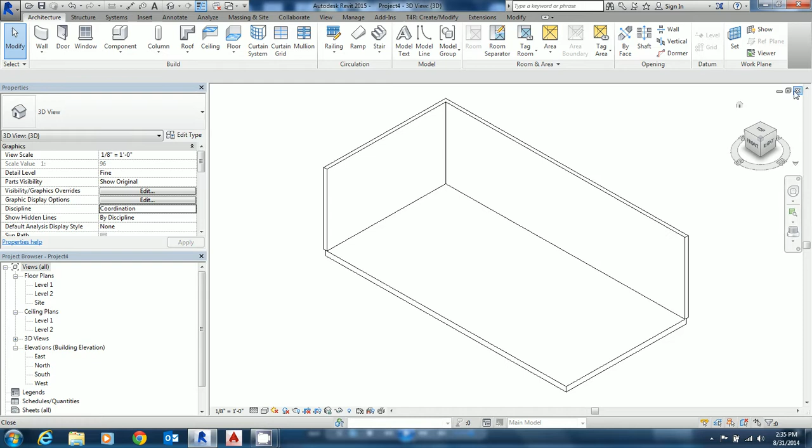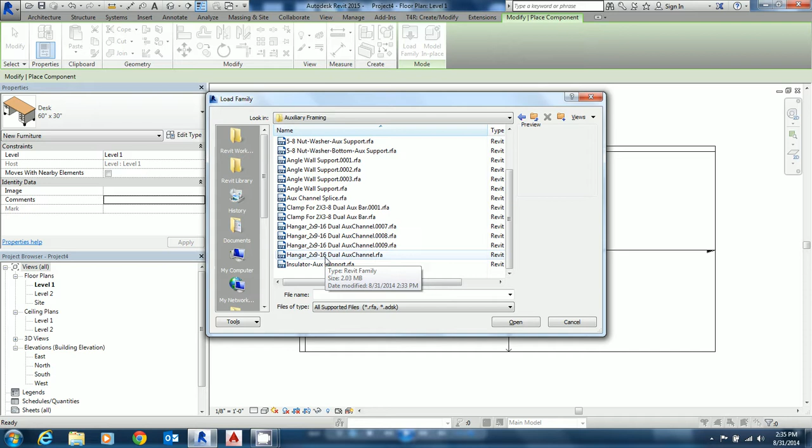So we have to load this in. So we go to our component and load family, go to our library, and then we're going to go here to cable tray supports, auxiliary framing, and we go down to hanger 2x9 here. Make sure you don't pick one of the revisions, pick the original here, and we'll say open.

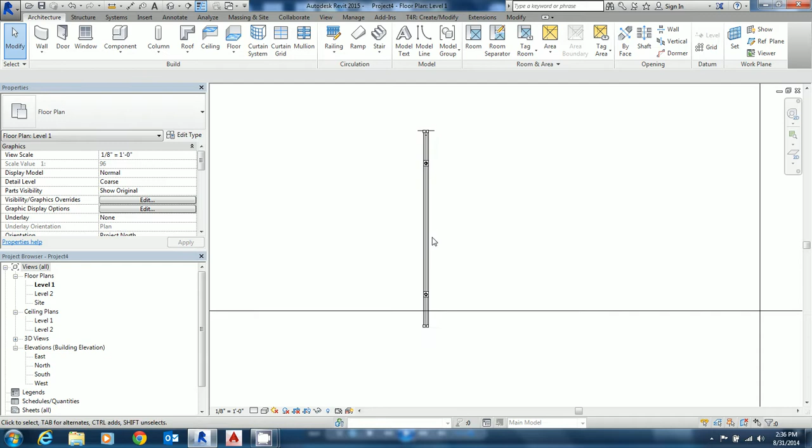It'll load in and we can see it right there, and we'll click it in place, and then we'll hit escape twice and we can see it there. We have our thin lines on to make it easier to see, but something just doesn't look right. So let's look back at our 3D view. If we scroll in on our 3D view, we can see that this aux bar is embedded in the floor, and the top surface of the aux bar is even with the reference level.

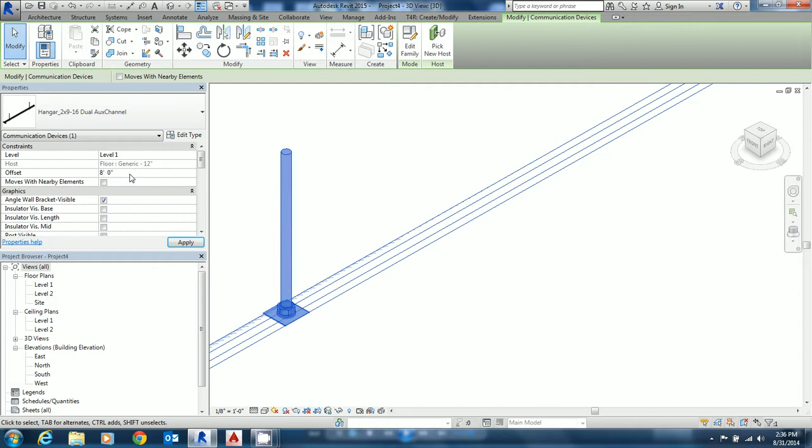Now this comes into play over here with the offset. This offset value is the level of the top face of the aux bar from the reference level. So let's just put it in at 8 foot. And we say OK, we'll remove our cursor out there, and we can see that this is now up at 8 foot above the floor.

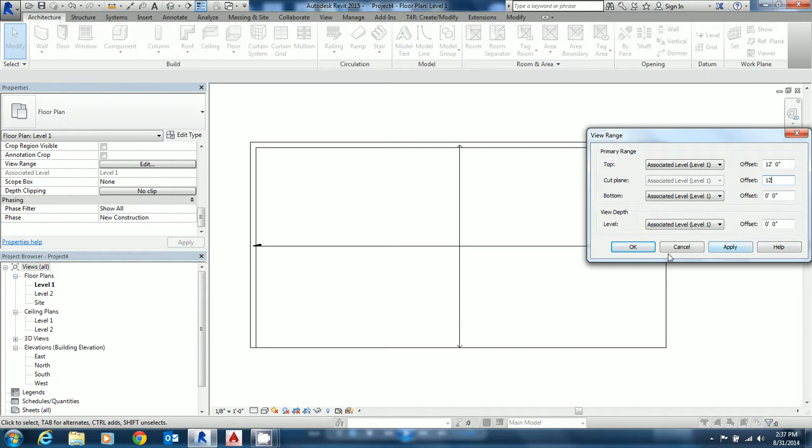And let's go back to our floor plan. We scroll out, whoops, it's not there. Well, the reason why it's not there is our view range does not see it. So we're going to edit our view range. We're going to change our top level to 12 foot, and we're going to change our clipping level to 12 foot, and then say OK. Now we can see it.

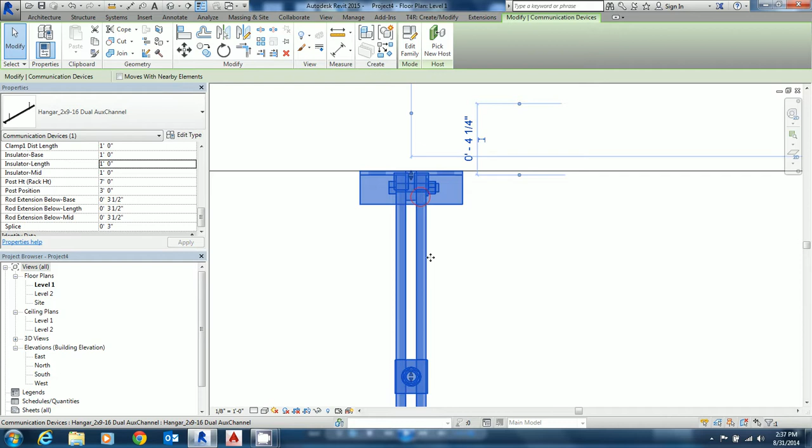So the first thing we're going to do with this is we're going to attach this aux bar to the wall. So I just grab a hold of it, make sure I get my move in there. I'm going to move it close and then scroll in, because I want to make sure that I snap it right onto the wall. Now our angle iron here is snapped to the wall. Again, if we go out and look at the 3D view, you can see that it is attached to the wall.

Now as we scroll in, what we see here is there are end caps visible on there, and we'd never have end caps on the aux bar where it's attached to the angle bracket here. So again, we'll highlight the aux bar family, and we're going to come over here, and in the graphics area here, we're going to scroll down, and we see end cap visibility base, and we're going to turn that off.

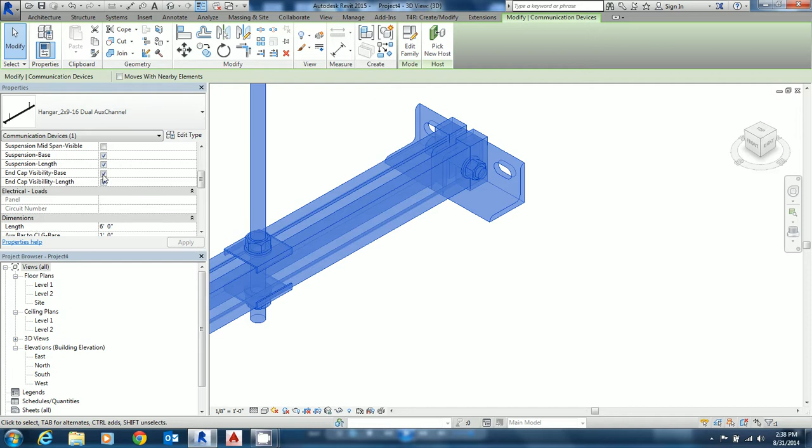And we see in here there's base, length, and midspan. Well, where that applies here is the base is this part here on the right where the angle is shown, and the length is here, and midspan is stuff that is in the middle.

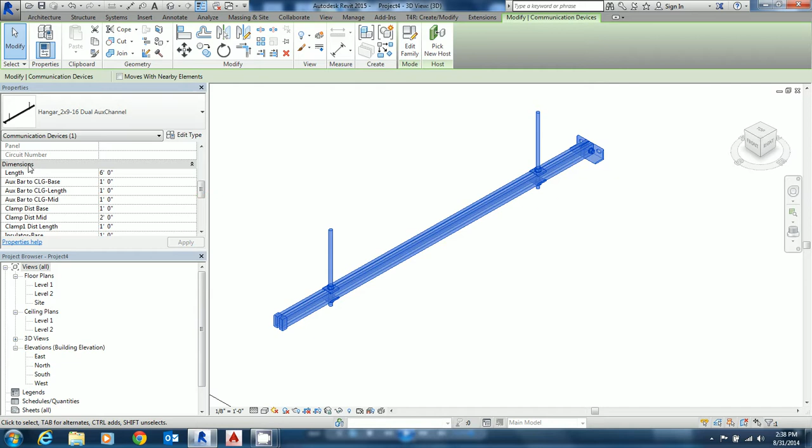So now let's see how we can adjust the length of the aux bar. Again, we come over, we select it, and in dimensions we select length, and a standard length is 10 foot. So we'll say 10 foot, and boom, it grows to 10 foot.

Now we see these brackets here with the pieces of all thread on it, and they go up for ceiling support. And how long those are is controlled here. Right now they're saying they're at 1 foot. So let's change all those to 5 foot there. And we can see that our all thread grows in order to get from the base of the aux bar up to the ceiling a length of 5 foot.

Now, one thing, we don't see the midspan. So if we go up here and we find suspension midspan visible, and we say OK, then we see the midspan become visible over here.

We can control the distance that those are from different points on the aux bar. So this is this clamp distance, base, mid, and length. Again, the base is the part that's attached to the wall. So we're going to leave that at 1 foot, and we're going to change the midspan to right in the middle at 5 foot. And as soon as we click that, boom, there it goes right into the middle, and that works fine.

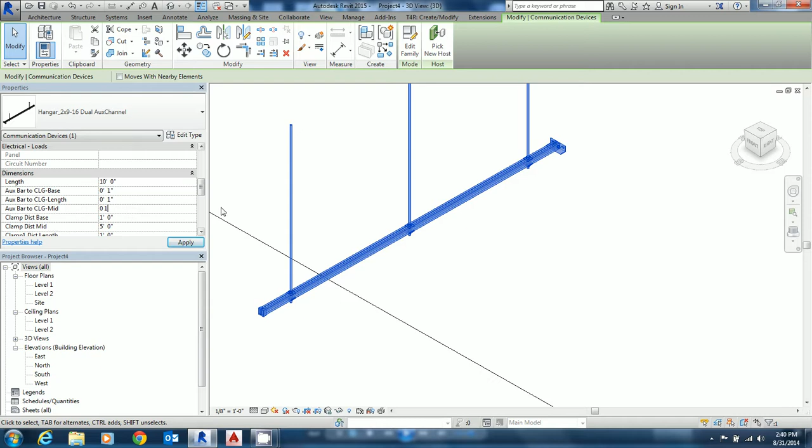What if we have to support this off of a cabinet or a rack? Well, the first thing that you want to do is take your aux bar to ceiling, and you want to change that to 1 inch, three of them in there, and we'll see that that shrinks that all thread down to where it's just barely sticking out. Now typically when we're supporting from a cabinet or a rack, we have to have the insulator in there, so we turn these three on and we'll see the insulator show up.

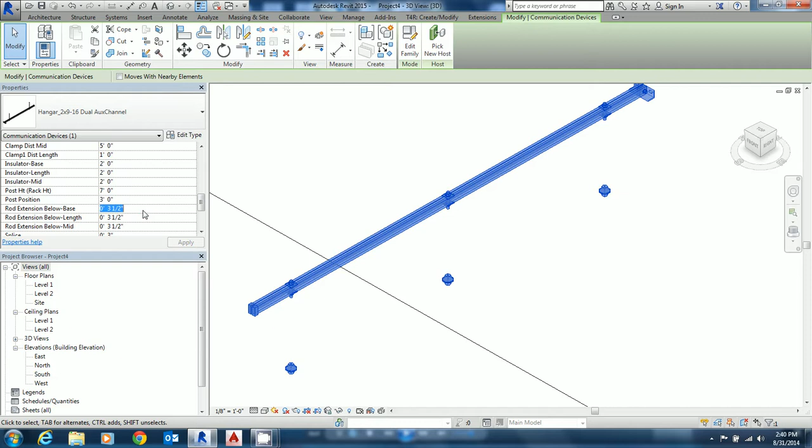Boom. We can also control the length, the distance of the insulator from the base. There it's at 1 foot. We're going to make all these 2 foot. And they move down to 2 foot. In here we can control our aux bar as well, and so we just change that to 2 foot. Say apply, and our aux bar goes down into the insulator. Very nice thing for us here.

Now let's say that we want to put a stanchion in here at the mid-span. So what I'm going to do here is I'm going to turn off the insulator mid-span, and I'm going to change the length of the rod extension below length down here just to 6 inches. That's 6 foot, that's the wrong one. 2 foot, mid-span is the one I want, 6 inches. See that apply.

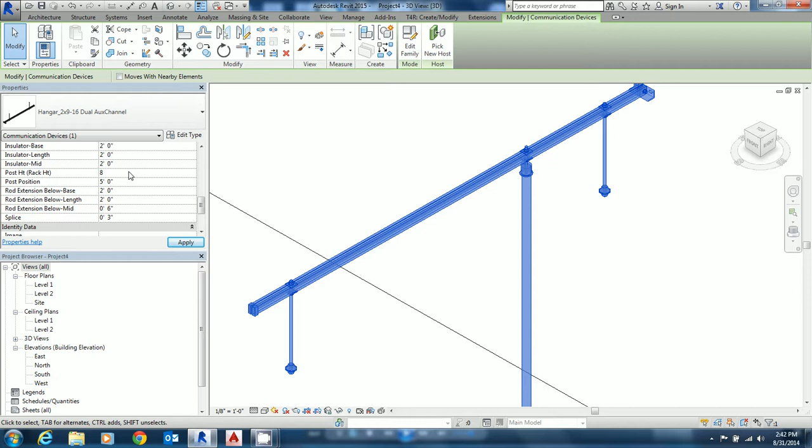Then I'm going to go up and turn on the post, make the post visible. There's the post. And actually I can turn off the insulator, where is it? The suspension mid-span visible. Turn that off. Then I can adjust the post position. This is distance from the base. So if I move that out 5 foot, and the post height, since we're above finished floor 8 foot, needs to be 8 foot. And hit apply, and it moves out there just fine.

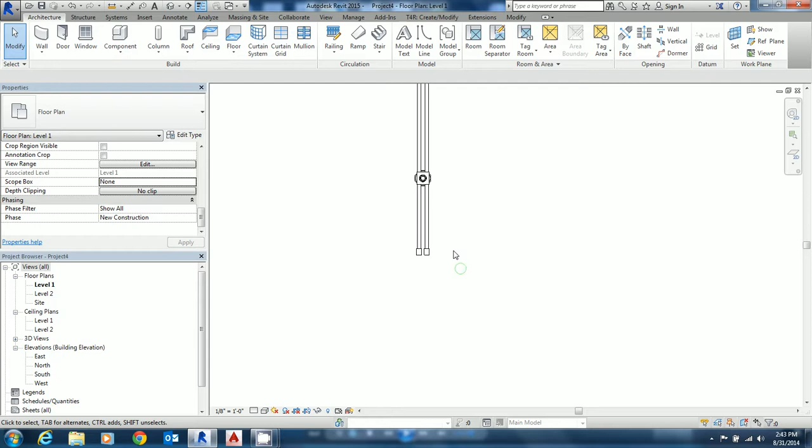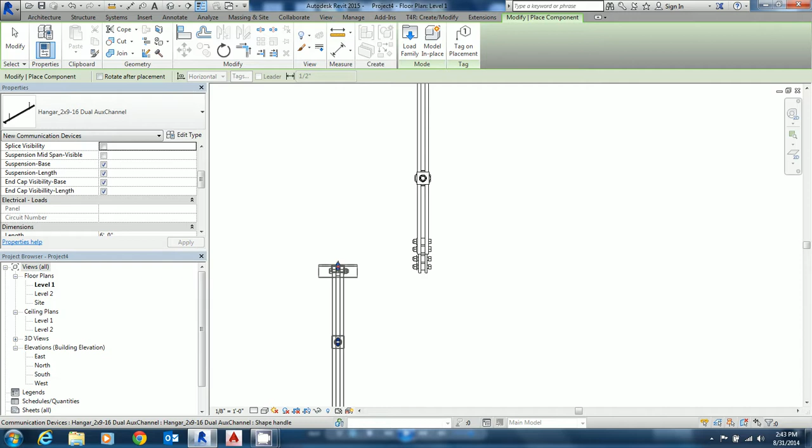Now this all works great there, but let's say we need an aux bar that's longer than 10 feet. 10 foot is the longest normal section that we get. So we're going to scroll down here to the bottom of the aux bar. I'll highlight the aux bar, and the first thing we're going to do is turn off the length end cap, and turn on the splice visibility. As I do that, now you can see the splice show up here, and we're going to install another aux bar. Hit component, it's still loaded, and we're just going to click over here and hit escape twice.

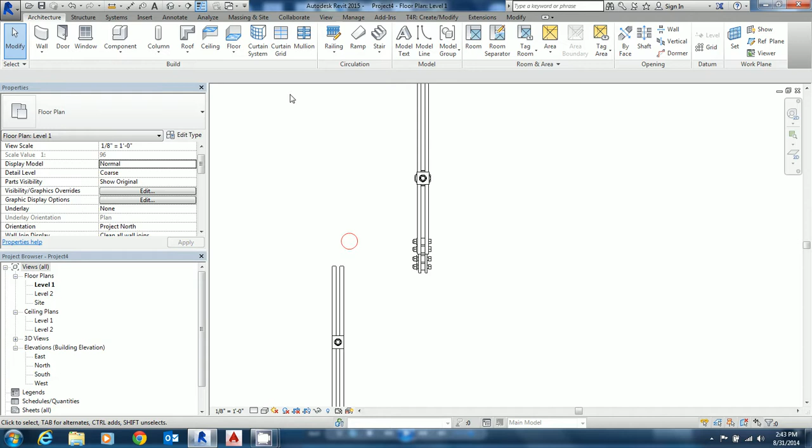We want to set this up. So the very first thing we need to do is turn off the end cap visibility in there, and we want to turn off our angled wall bracket. The other thing is we want to set the offset to be the same at 8 foot. Now we can go ahead and align these items. We'll go up to modify, align, pick the center line here, center line there, click those together. Now we want to make sure we grab the end of the original aux bar, and then the end of the new aux bar, and link those together.

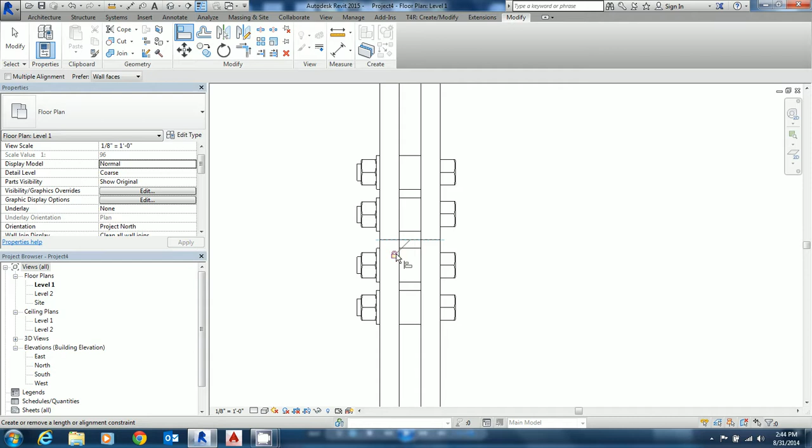And we're going to hit escape, and if we look back at the 3D model, we can see that we've added another length here, and this length is individually adjustable. Some oddball length now, we'll just call it 6 foot, and it's in there. And that's it.